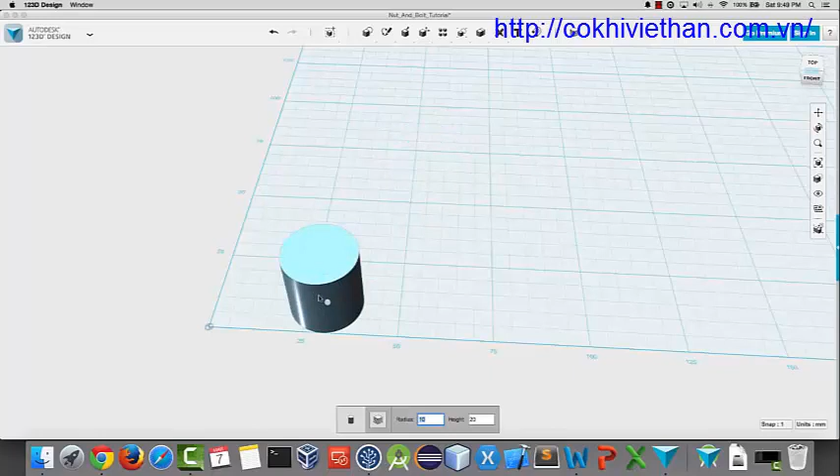We bring it down, and what we're going to do is set the radius for this guy to 4, and we're going to leave the height at 20. Radius just sets the thickness of the bolt. So we'll go ahead and put him down there.

Then we go back up to our primitives menu and grab a torus. For the torus, the major radius needs to be the same as the radius for the cylinder, so in this case it's going to be 4. And then the minor radius, which controls the thickness of the threads, we're going to set that to 0.5, which is a value I've used pretty frequently when making these for different things.

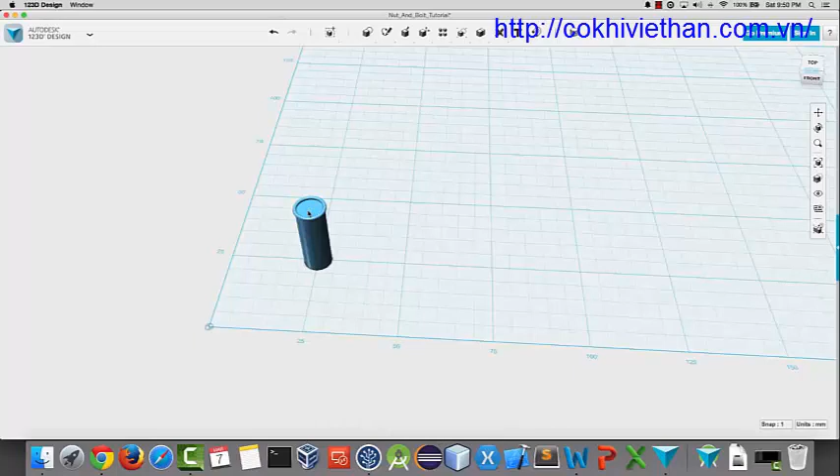So once we have all that set, we're going to place this torus on top of the cylinder, centered on top. Once we put that down, we'll select the torus and press D, and that will drop it down to the XY plane, setting its Z coordinate to 0.

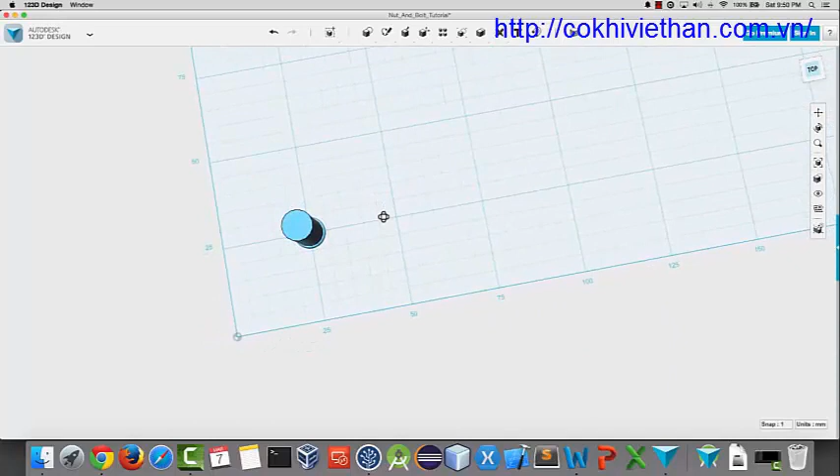So now that we have that in place, we need to draw a polyline, and we're going to draw this line to just cut the torus in half. So we're going to draw it exactly through the center.

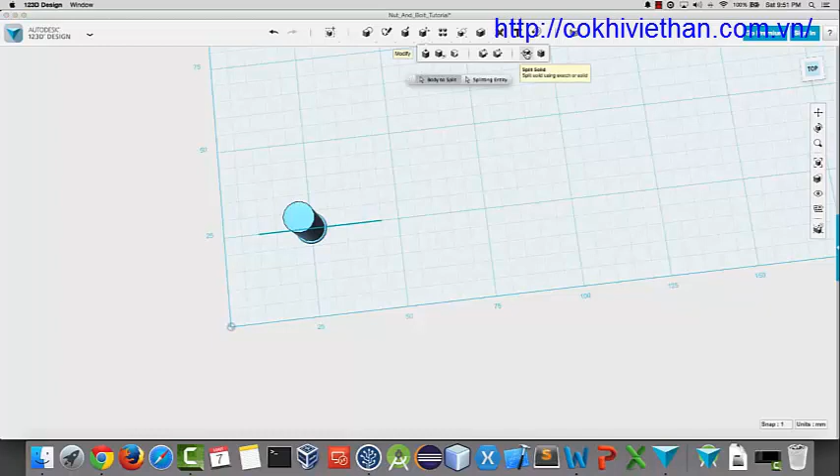We've got our line. Now what we want to do is use that line to split the torus in half. So we're going to go up to the modify menu and scroll over to split solid. We select the torus, then change the selection to split entity, and select that line we just drew.

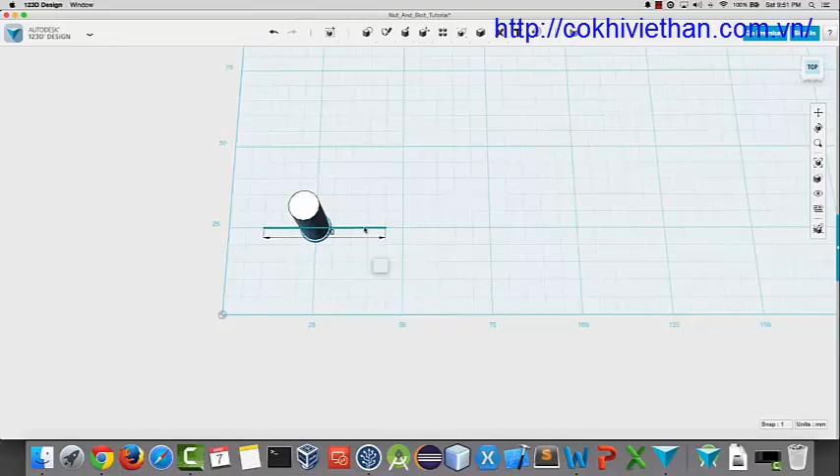Now you can see what it's going to do is split that torus in half based on where that line is. So we hit enter, and there we go. We can get rid of that line, and if you scroll in, you can see that it is actually split in half.

So now we're going to move these halves of the torus around a little bit. We select the first half, select move, then grab the angle knob, the X angle knob, and set that to typically a relatively small number. In this case we're going to choose 6, so it's going to slant it 6 degrees.

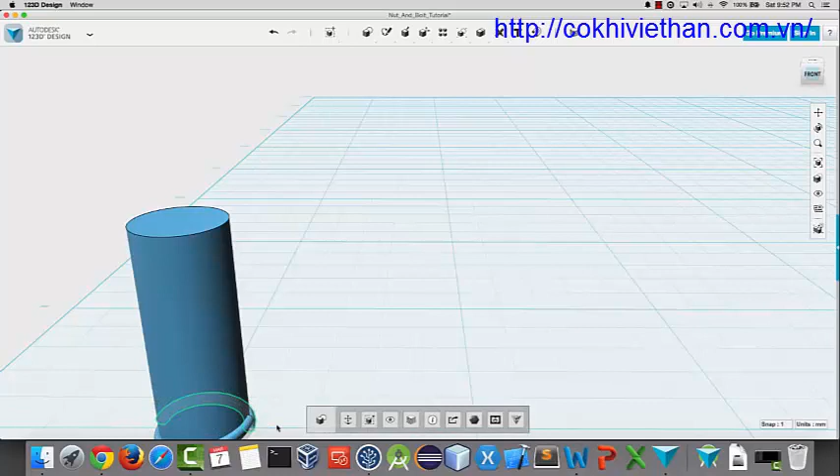And then we select the other half of the torus, click move, and use the same X angle knob, and put -6. Whatever number you put in, it needs to be the negative of whatever you set the other to be. So you hit enter, and now you can see they're a little out of line.

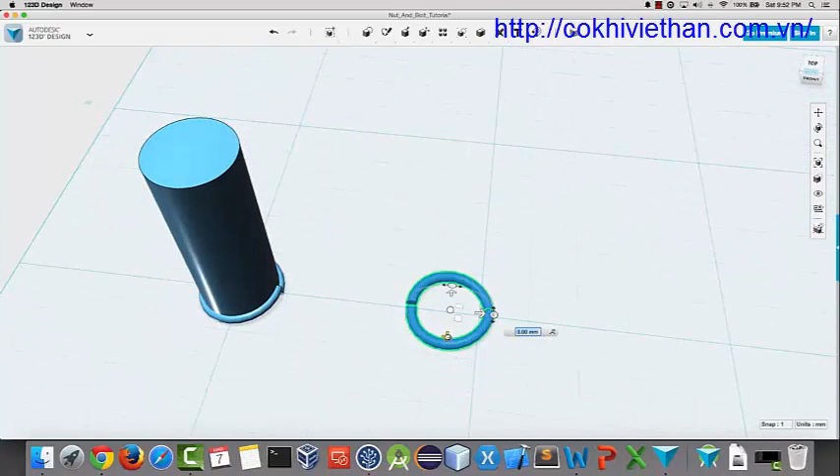So we select both halves of the torus and make some copies. You do Control C, Control V, or Command C, Command V if you're on a Mac like I am, and we make some copies - 1 copy, 2 copies, 3. I know this would probably be faster with something like the pattern tool up here, but I've kind of committed to doing it this way, so that's what we're going with.

Alright, so I think one more set will do us. There we go. So that should be enough.

Now that we have all of the pieces of the thread that we're going to need, we start putting the thread together. So what we're going to do is use the snap tool to start snapping this thread together. So you click the snap tool.

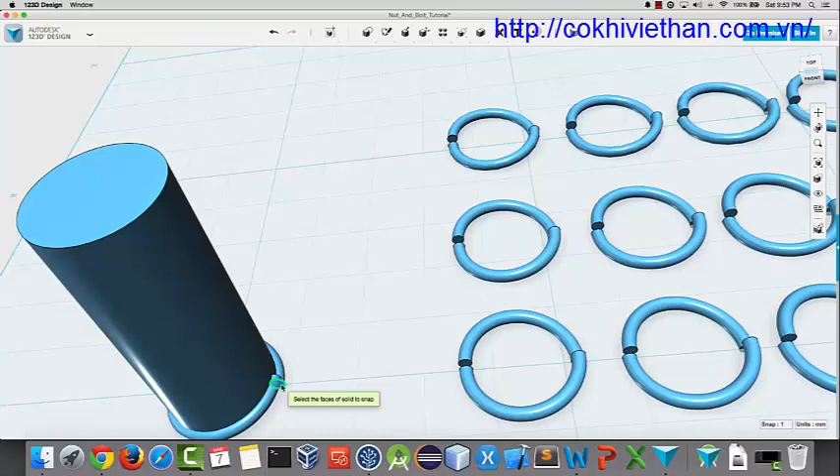We're going to click the face of this guy, and we're going to try to position our camera better. Ooh, what's happening? Okay, that was rough. Let's see if we can't get a better vantage point here.

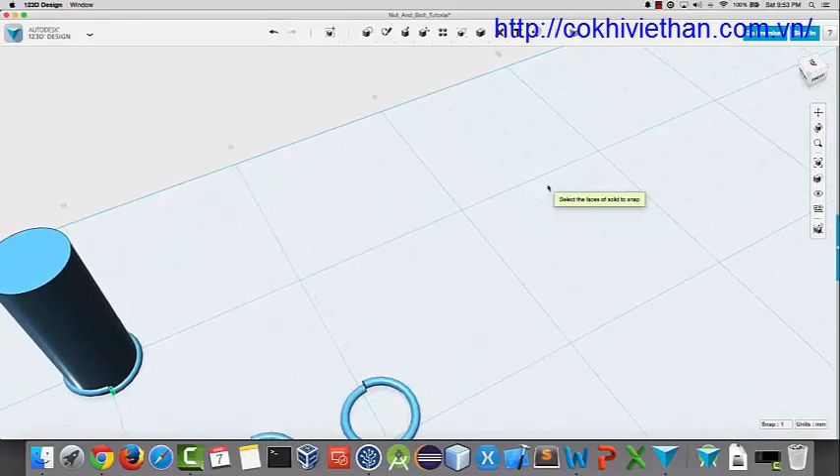There we go. We're going to select the other face that it got out of line with. So we do that, and let's go back home. You can see over here that the threads are going up like you would expect threads on a bolt to go.

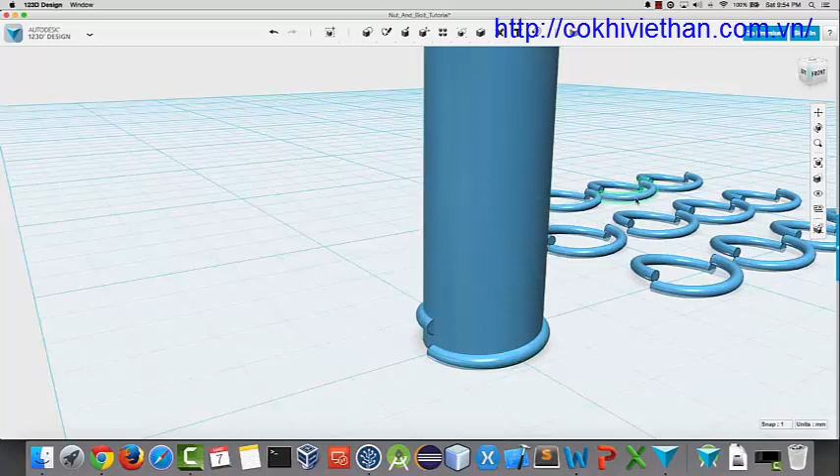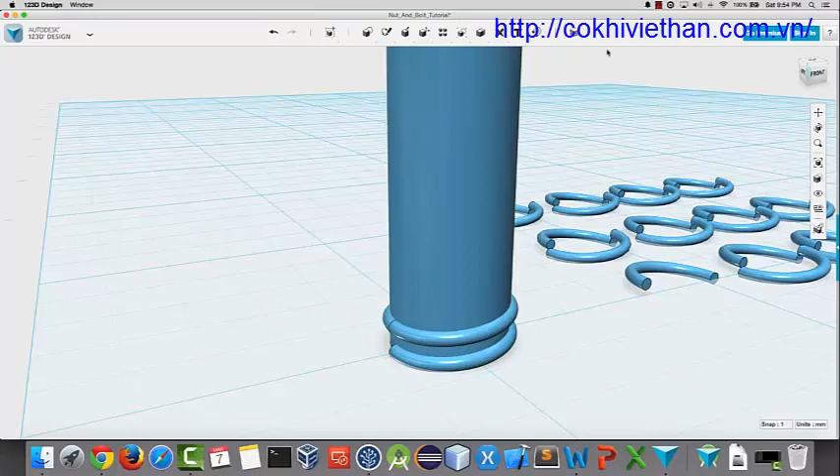So now we are going to just continue snapping. What you're going to want to do is use the snap tool, click whatever face of one of these copies would match up with the face not attached to any threading. So you click here, and then you click here. There you go. You just keep doing that, just like this.

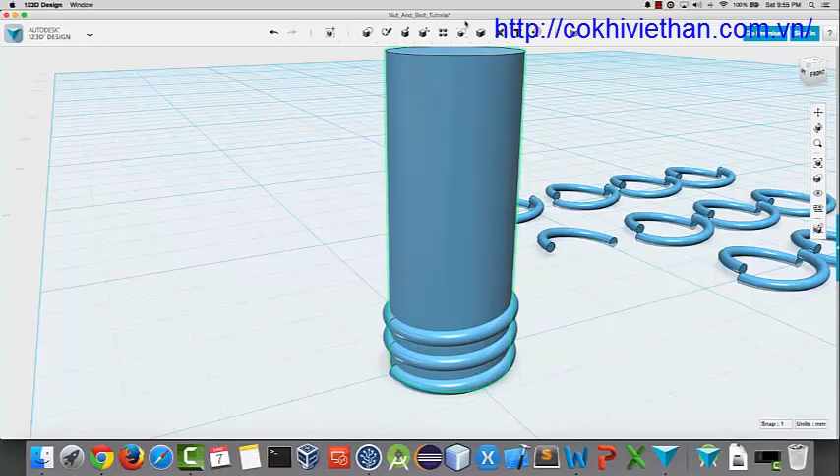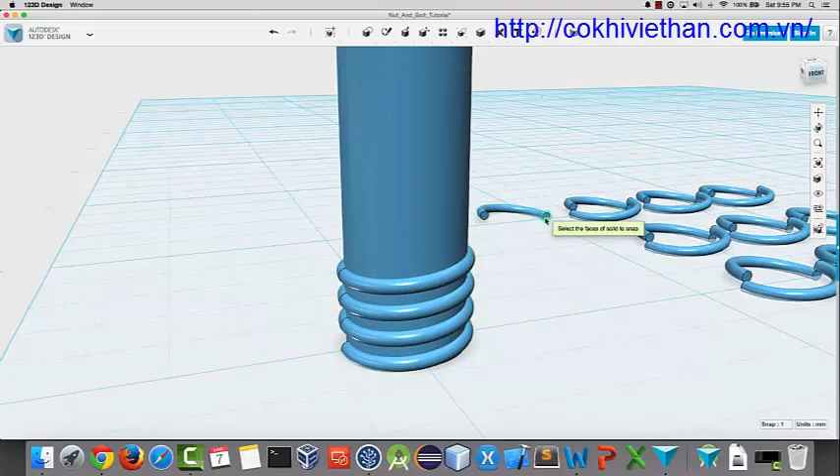I'll do a few pieces, but this is rather tedious, and there's probably a faster way to do it, but if there is, I am not thinking of it right now, so we're just going to go with this. Just keep on snapping, and I think by this time everybody kind of gets the point, so I'll probably speed this up or cut it out altogether so that it does not bore you, and we'll come back when the threading has run up all the way to the top of the bolt. So we will be right back.

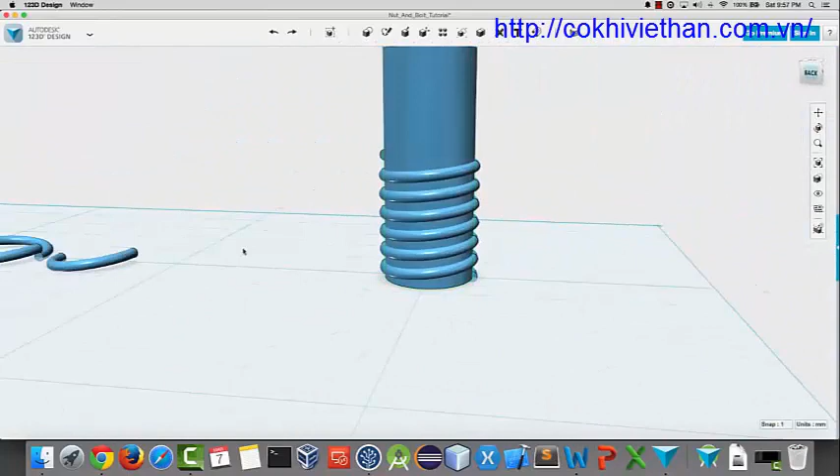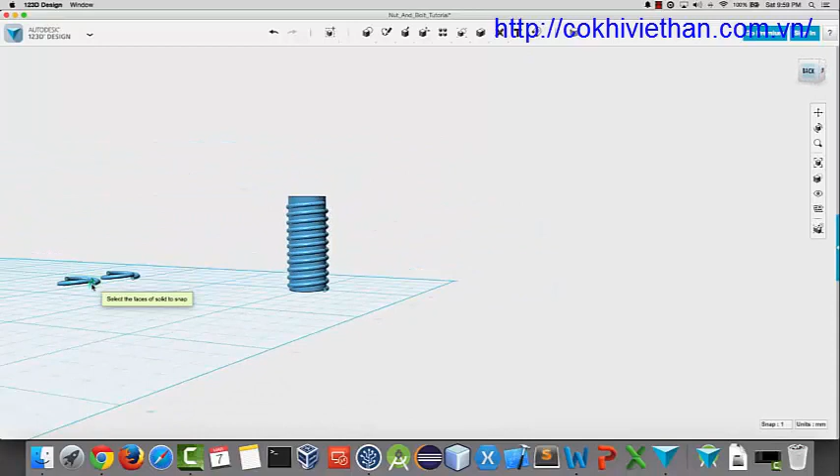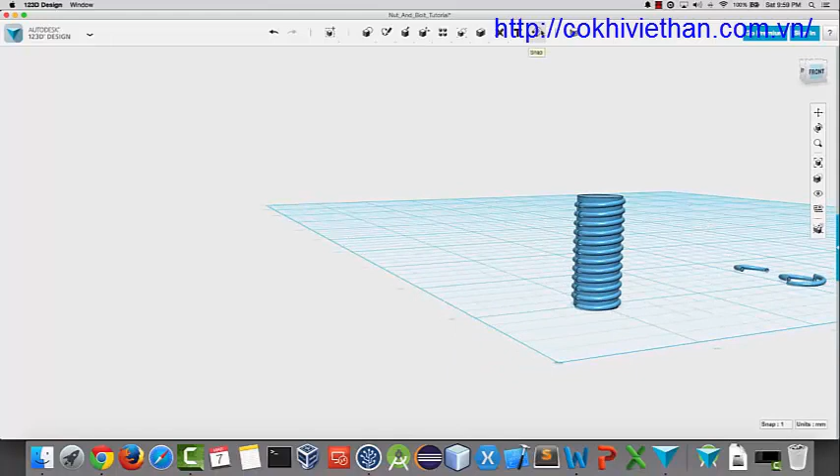Okay, so we're back, and we're just about at the top. I wanted to explain that I like to put the threading all the way up past the top of the cylinder, so that it comes up and runs into the head of the bolt. It's really a preference, you don't have to do it, but I do, and if I were advising someone else, I'd probably tell them to do it too if that's what they needed.

So now, wow, we had just enough threading. One thing I'd like to do is snap one more piece to the bottom right here. There we go, and I guess we can go ahead and delete that one.

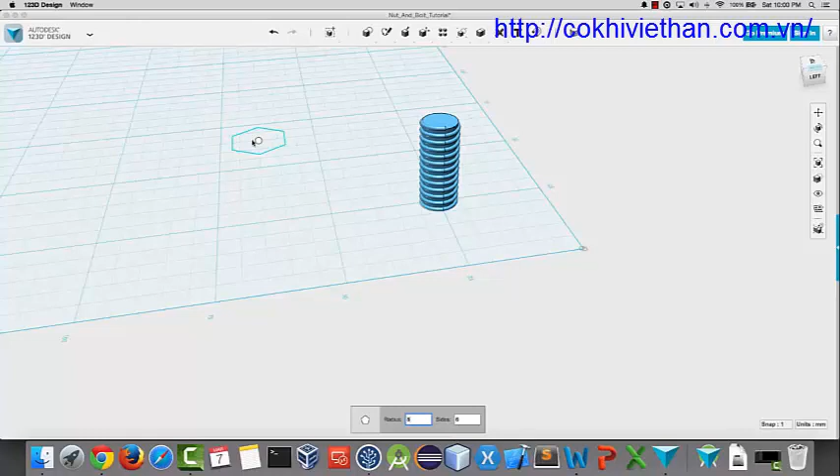So now what we need to do is create a polygon. We'll come over here, go to polygon. For sides, we're going to choose 6, so that if you make this a size that can fit into a particular socket, it'll work out for you. We're going to put the radius of the polygon at 8, just kind of arbitrarily picking that. I also believe it's a standard socket size, I can't remember which one, but I think it will fit. Anyway, we're going to go ahead and place it down.

Okay, now that we have our polygon, what we're going to do is create a copy of this. So we're going to make this copy, and drag it over here.

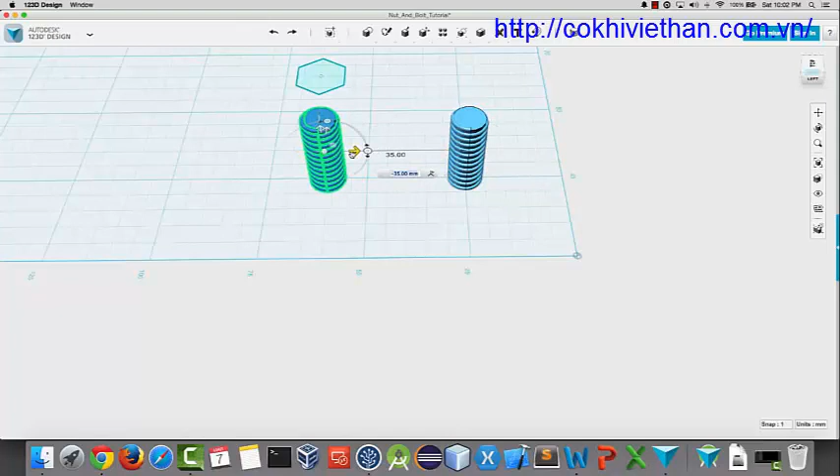Now what I'm going to do is select these bottom pieces of threading, make them individual pieces, and delete the bottom two pieces on this one. Then I'm going to select the whole thing and scale it. So this bolt that we've copied and taken the bottom threads off of is actually going to be the piece that we use to make the nut.

Since my goal was to 3D print these, making it the exact same size as the actual bolt is never going to work, because of inaccuracies of the printer - that's actually exactly what it is, I'm pretty sure. Either way, you're going to want to scale the object as a whole to be larger. So you hit scale, and this is just sheer experience from experimenting, but I've found that 1.09 as the scale factor works really well - not too tight, not too loose. If it comes out kind of loose, you can knock that up to 1.1 and it gets a fair bit tighter. I can't tighten them by hand, I have to get a tool.

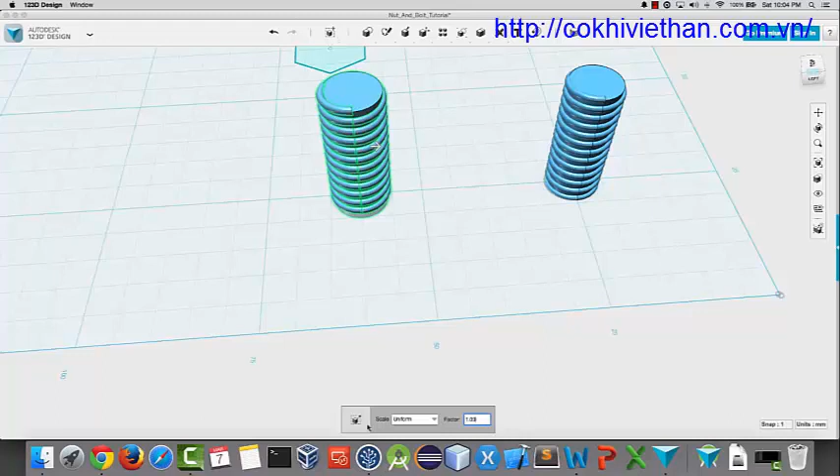So if you've used the appropriate size polygon to get something that fits into a socket, it's actually a lot easier to work those together. My preference is 1.09. So there we go, we've scaled it to be larger.

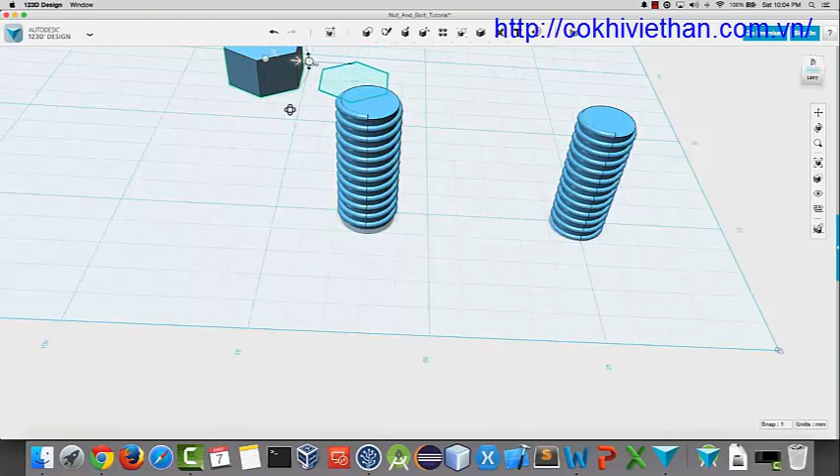Now we want to extrude the piece for our nut. The nut is going to have a height of 8, which again is kind of arbitrary - that's the size I typically make them, they have a good size to them, but that's completely subjective. You can make it any size you want, you just want it to be thick enough to be durable.

So now we're going to merge this into one object so we don't only move some of it. Okay, I messed that up, let's try that one more time. Going to merge it. Okay, third time's the charm. So now we're going to merge this together.

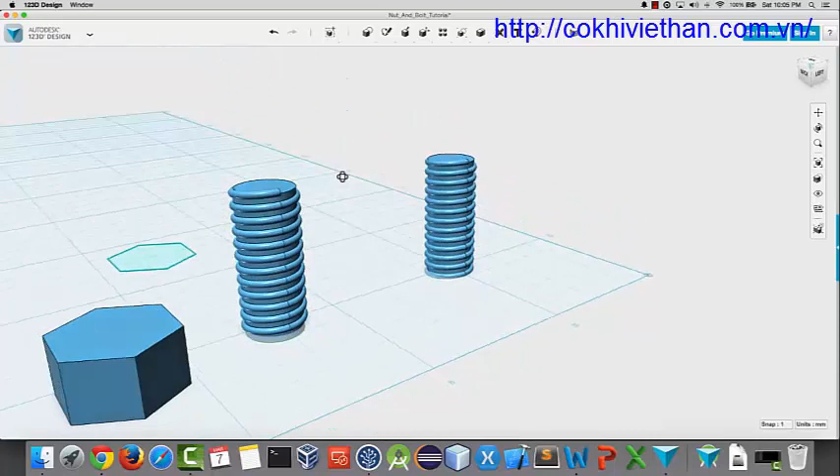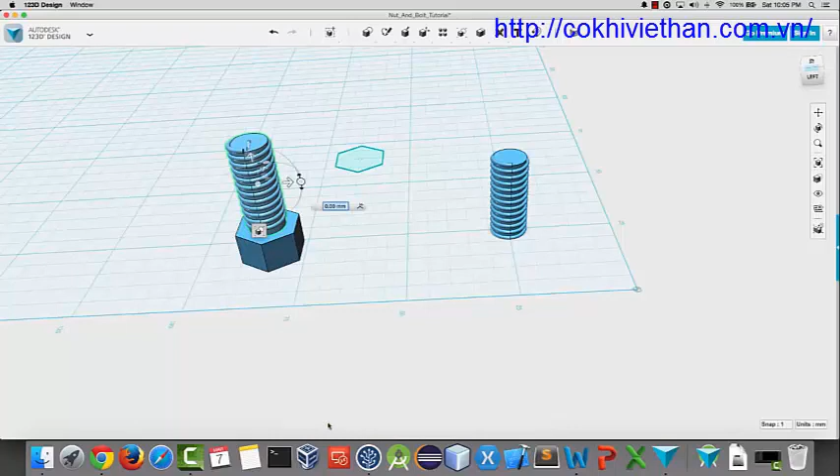Let's go ahead and select all the pieces. There we go, perfect. So the reason I removed the bottom threading off of these is so that once I merge it all together and snap the bottom of this thread to the nut, it would be centered on the nut. I've actually just started doing that, because if you run the threading all the way down to the bottom and combine them all into one object, it will not be exactly centered on the nut. It wasn't really even an issue, it was more of a cosmetic thing that bothered me.

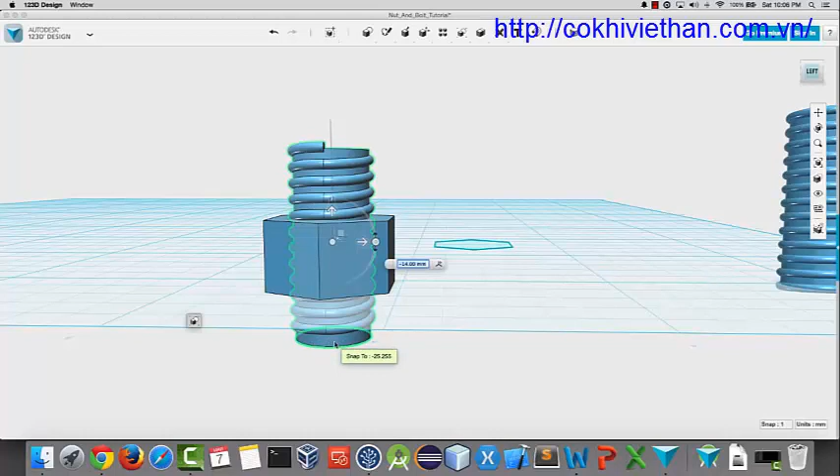So now we're going to take the nut and slide it completely through the bolt. The only thing you want to make sure of when making the nut is that the threading runs all the way through the nut polygon. You don't want to stop at the section where we removed threading - you want threading barreled all the way through the nut.

So we've moved it. We're going to do a subtract operation up here in the combine menu. First you click the nut, then you click the bolt thread, and there you go - there is our nut.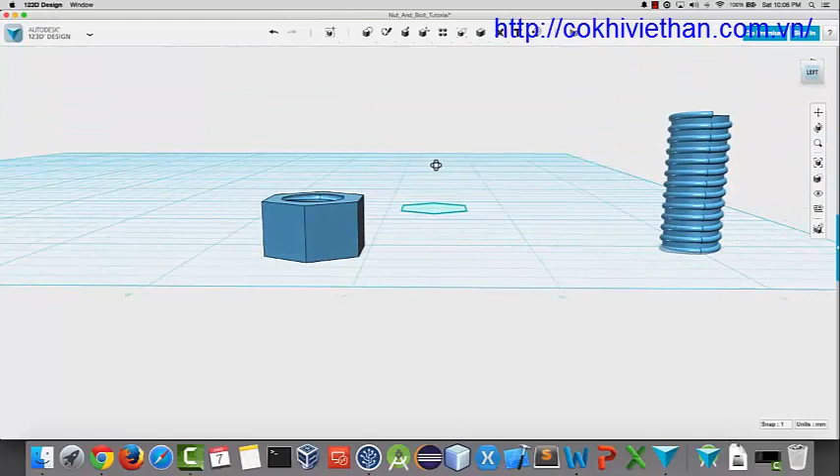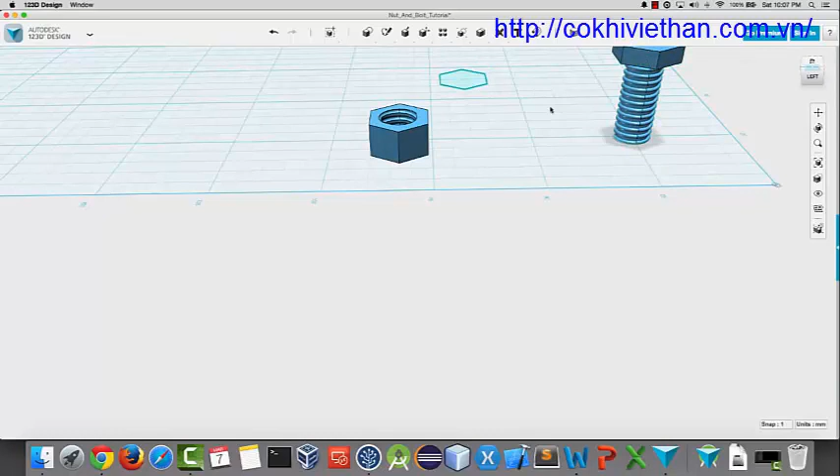So now we really only have two more things to do. We have to make the bolt head, and we'll make that a polygon. We'll raise it out of our existing polygon sketch with a size of 4, then use the snap tool to snap it onto the top of that cylinder. Then we'll make one more - let's readjust our camera - so then we'll extrude one more arbitrarily sized piece.

So now what we're going to do is merge this all into one piece. There we go, so now that's all one solid piece.

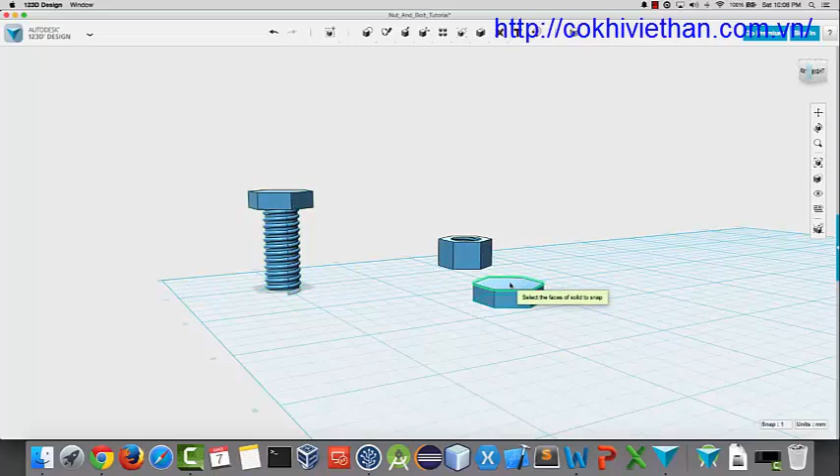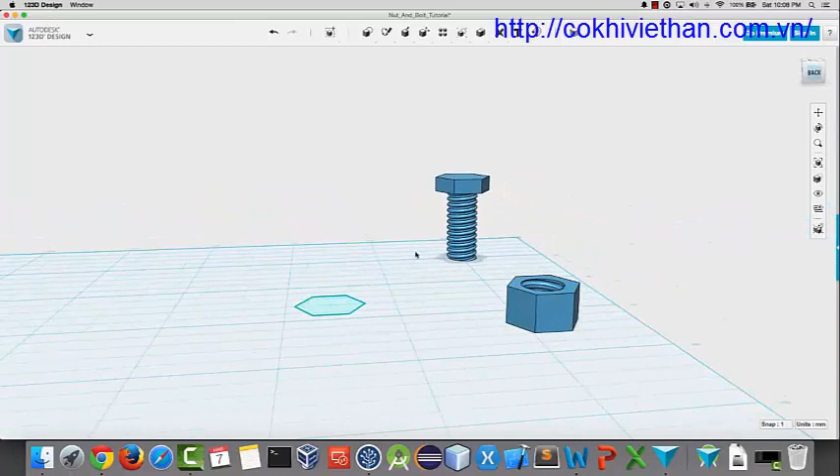We're going to snap him to the bottom, and then what we're going to do is take the subtract tool again from the combine menu. We're going to subtract the whole bolt from this polygon, and what that's going to do is make our threads run all the way flush down to the bottom. So there we go. We've got our nut, we've got our bolt, and what I'll actually do is send these over to my 3D printer.

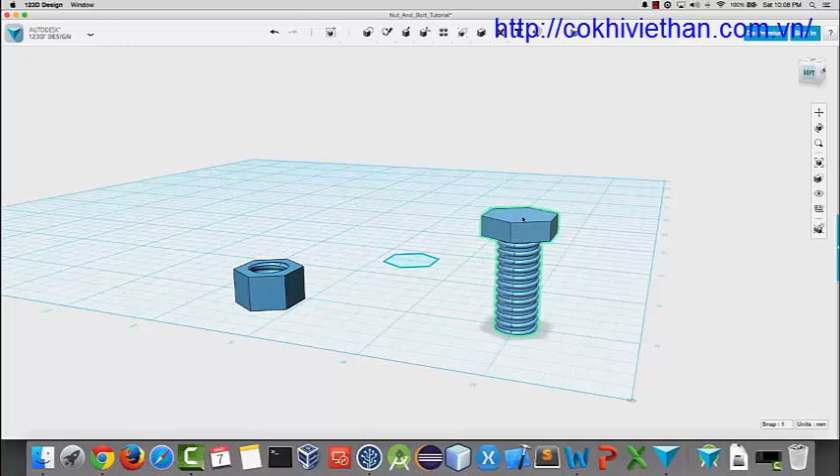So I'll go ahead and shoot a real quick video taking them off the bed, screwing them together, taking them off. If you're going to 3D print this, the only real consideration, and this is probably obvious, is that you want to print this so that the top of the bolt is actually on the bed of the printer. Pull in one of these right here. Just one more. There we go. So you just want that to be like that.

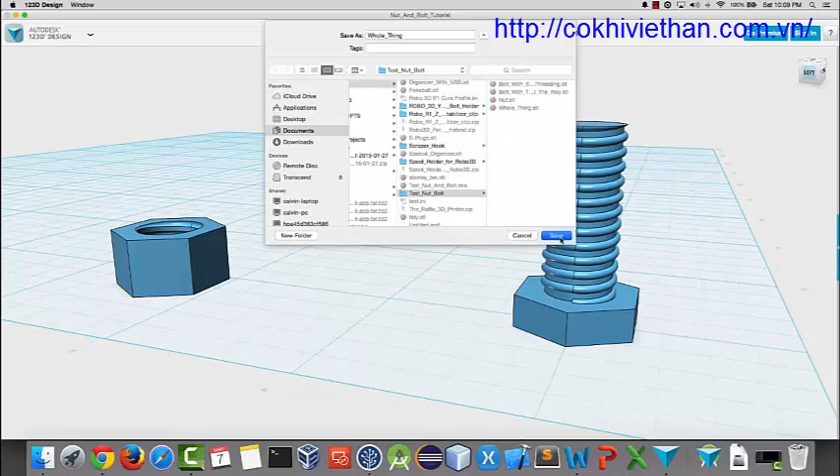And then, in case anyone's interested, to export this out, we'll just go export to STL. We'll hit OK. Then you navigate to wherever you put your files, and you can see I already did this before, but we'll go ahead and overwrite this file called whole thing because it's going to export an STL of both the nut and the bolt. So we will go ahead and write that out. We'll delete these files to make sure that we're using the ones that we just created.

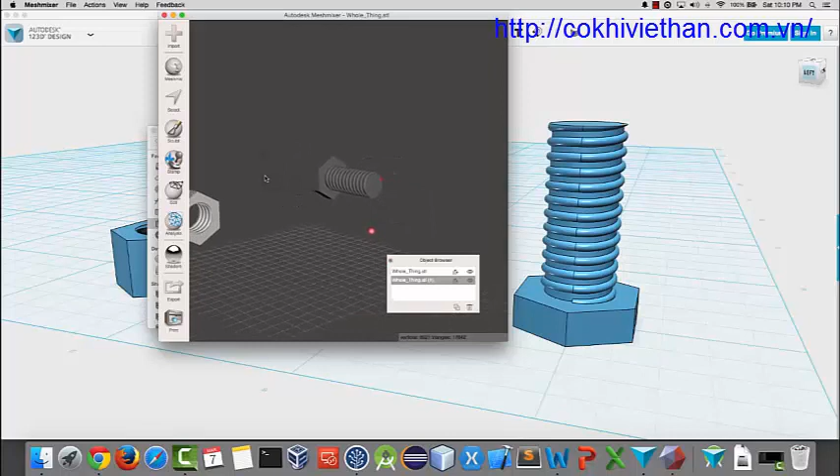You open the STL. Mine opens in Meshmixer. That's the only thing I really use to do this. I'm not sure how to do this in other programs, but you can see in the object browser we have two objects. We have the bolt, we have the nut. Whichever one of these is highlighted, if you click export, it's going to export that object singularly. So if we go back to our folder and type in nut, now we have the STL for the nut in its own file.

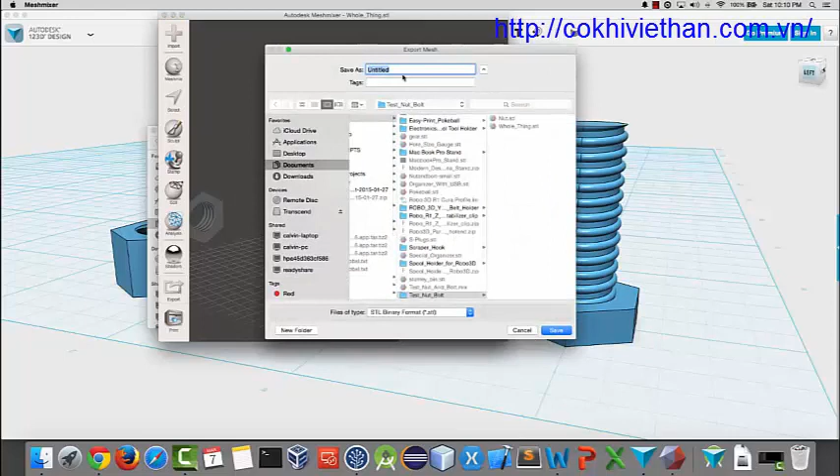We can go to the bolt, do the same thing, highlight the bolt, and we'll call this bolt. We'll save it, and there we go. We have our STL files that we can run to the 3D printer. So I will go ahead and set those to print, and we'll show you how it goes.

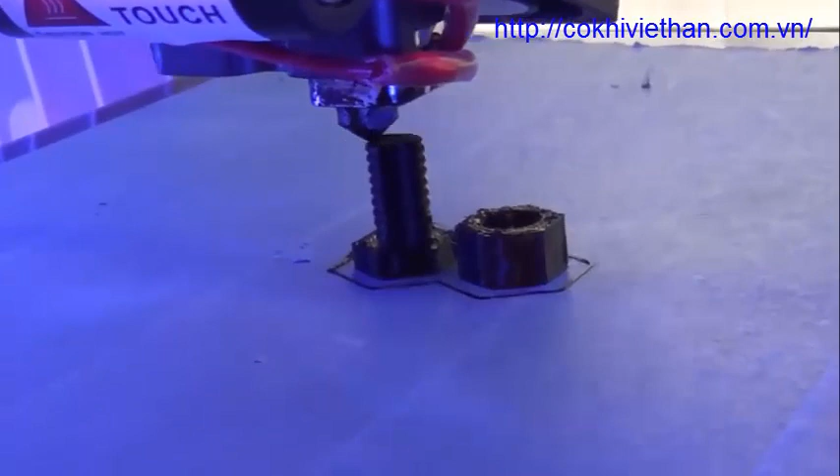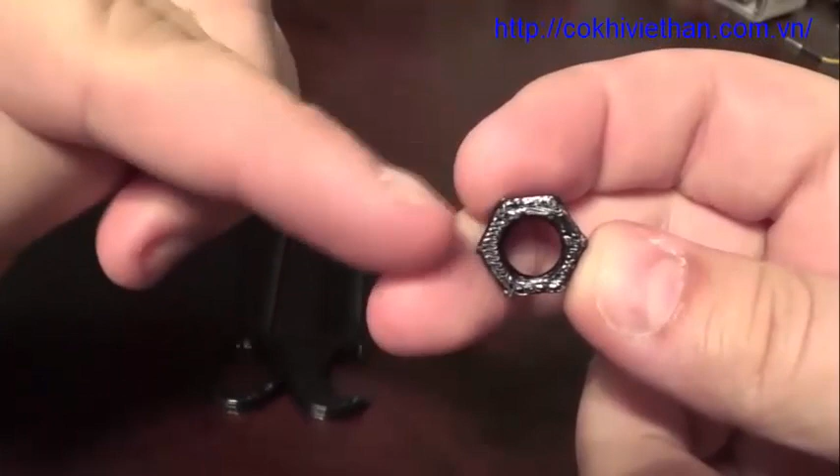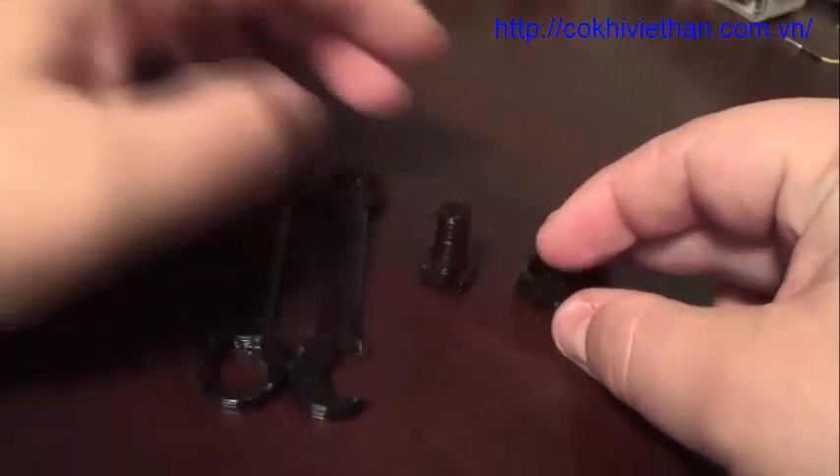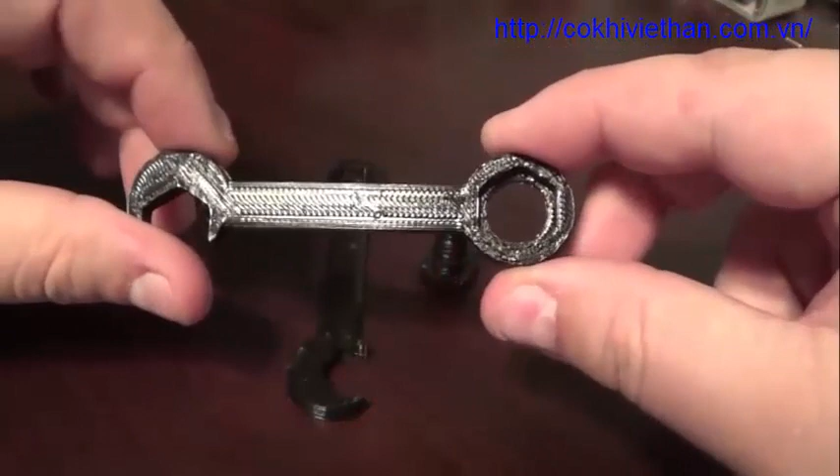So here's our nut and bolt off the 3D printer. I cleaned them up just a little bit. There were some strings inside this nut, but they were easy enough just to scrape out. And honestly, you don't even need to. You can just put the nut and bolt together and it will remove any kind of burrs inside the part. So I also made and printed these because these things can actually be pretty hard to put together by hand. I can make another video if there's interest on how I made this.

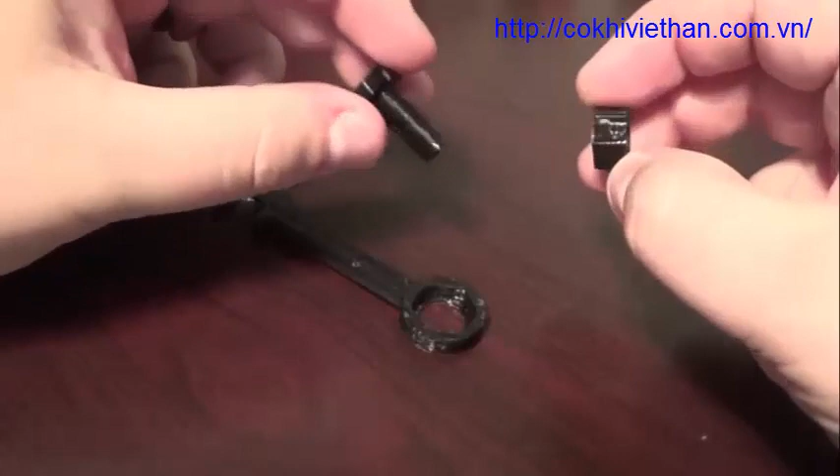It's actually super simple, but I just wanted them to help me put them together and take them apart, because the first time you put these together, they're likely to be kind of difficult. Not really getting it started per se, but once you get a bit down the shaft of the bolt, it can be pretty difficult. So I just made these to help out. And you can see, if I can get that lined up, there we go. So we can just turn this guy underneath.

You can see the bolt rising out of the hole in the top of the wrench that I made. And I actually made it so that they weren't just a polygon all the way through, so that it would catch it and I could do this easily without having to worry about the bolt slipping all the way through the wrench. So there really isn't a whole lot of resistance when using these, but if I was doing this by hand, I imagine it would be pretty tight.

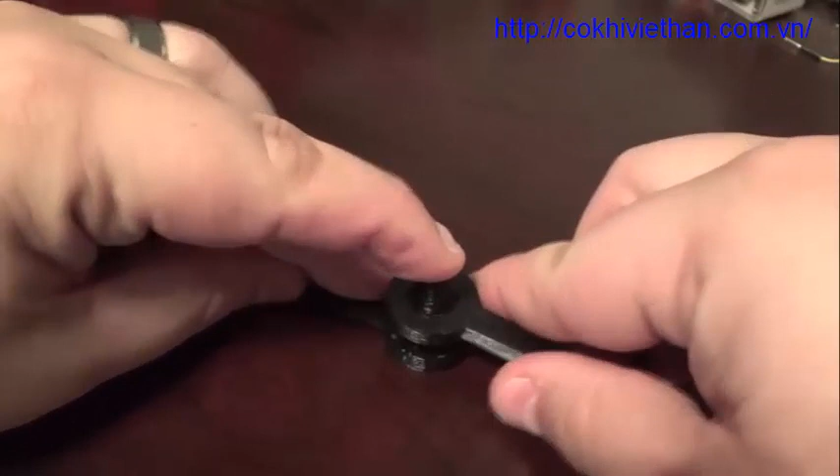So here we are completely together. It's all the way together, and you're probably not going to be able to take that apart by hand. I just tried pretty hard. I'm going to try again. Yeah, they're together pretty good. So we can use the tool and lefty loosey. Let's see, left. Nope, that's right, left. Nope, oops. Let's try that. There we go. Got to break it loose because I tightened it up a good bit.

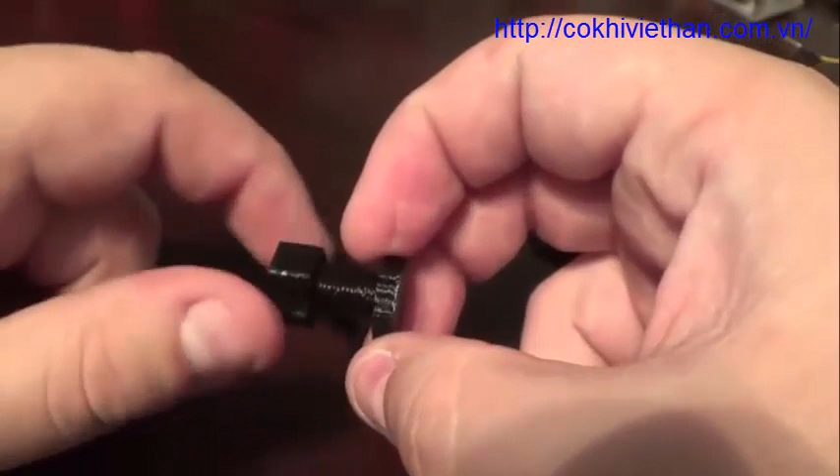So there you go. Nut and bolt, it works. I've used them to hang things that I've also 3D printed, and I gotta say, they're tough. When they're even partially tightened down with the scaling we had set, 1.09 on the clearance inside the nut, there's no play. Now you can do it at this point by hand, but there's no wiggle. You can't just pull that apart or anything. It is really together. So yeah, I've found a lot of uses for these, and for these.

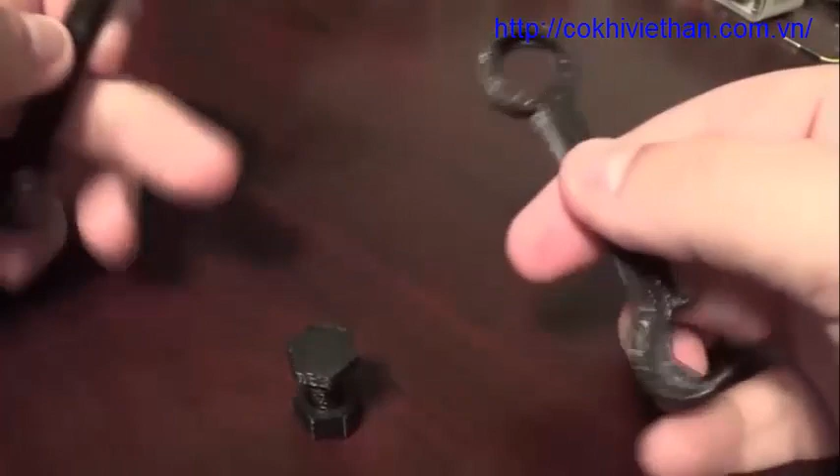These are really cool and easy to make. Like I said, if there's any interest, let me know. I'll make a video on how I made it. It's actually very easy. If you can't figure it out just by looking at them, I would make a video for it. Anyway, hope you guys enjoyed it, and I hope it's helpful.